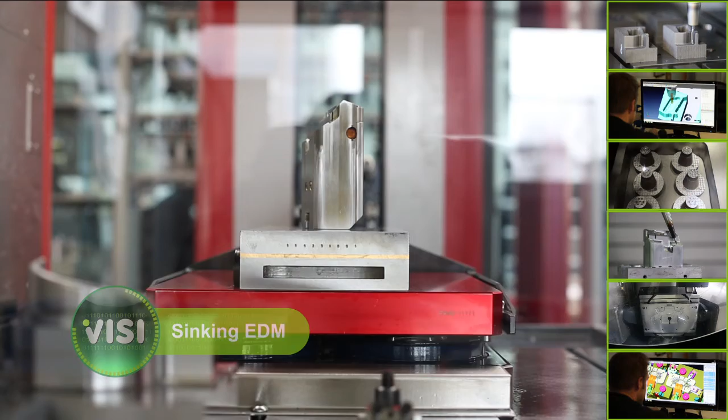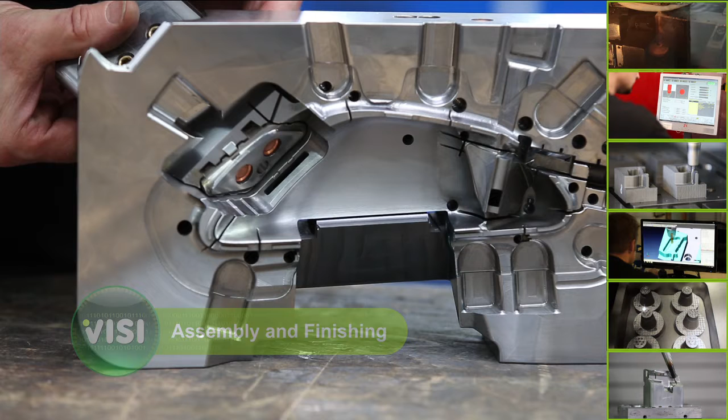VISI, the CAD/CAM solution for the mold and die industry.

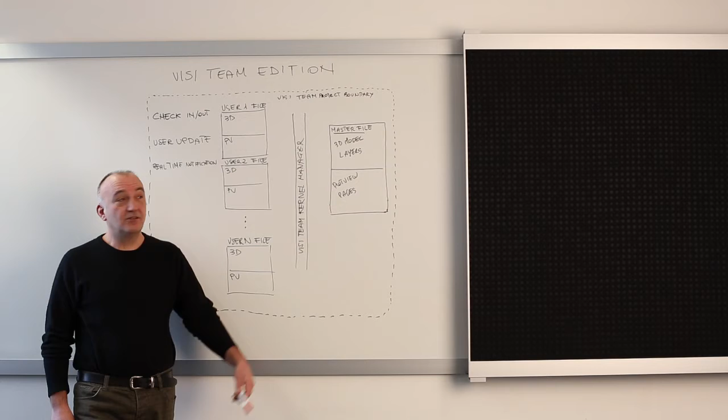During design time, a user has to be able to provide updates of their work to other team members to ensure high level of transparency of the work progress. The VISI Team Edition implementation is based on a number of fundamental concepts. First, the master work file and user work file concept.

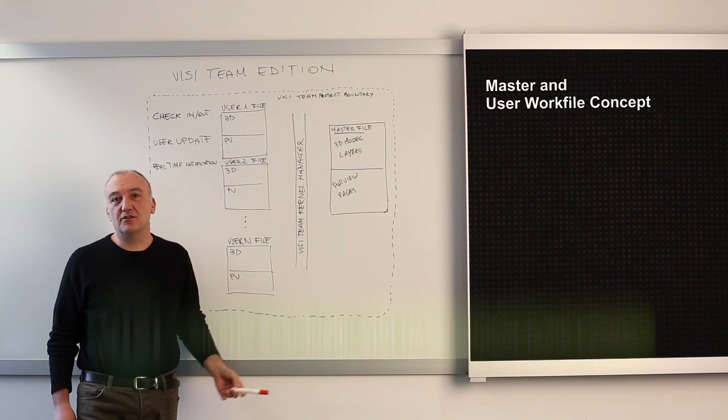The master work file contains all data created by each individual team user. As users should be able to work independently, VISI implements another file type, user work files. These are file copies directly assigned to single users, allowing them to perform their individual jobs.

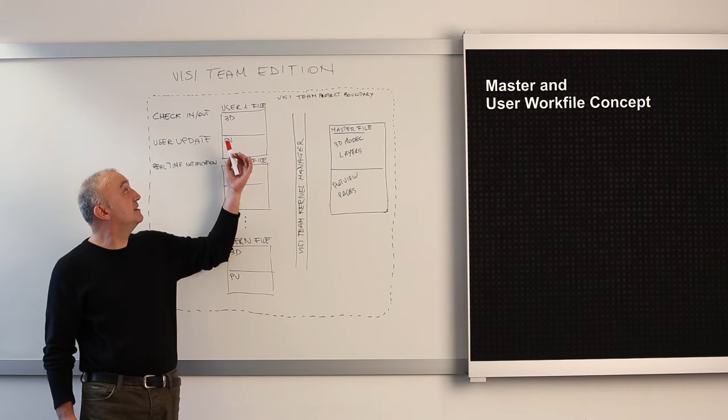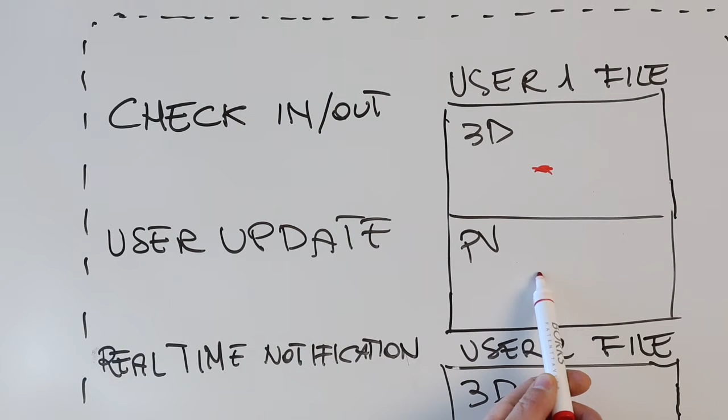Another fundamental principle is the check-in and check-out concept. Every user working within the 3D modeling environment or the 2D plot view environment has the ability to reserve a set of layers in the 3D environment or a set of pages in the 2D plot view, which moves them to a single user mode. This mechanism is called check-out.

Once a user performs the check-out operation, they have exclusive access to the previously selected layers and plot view pages. This feature enables them to work independently until they decide to share their progress with the other team users. The sharing operation is called check-in.

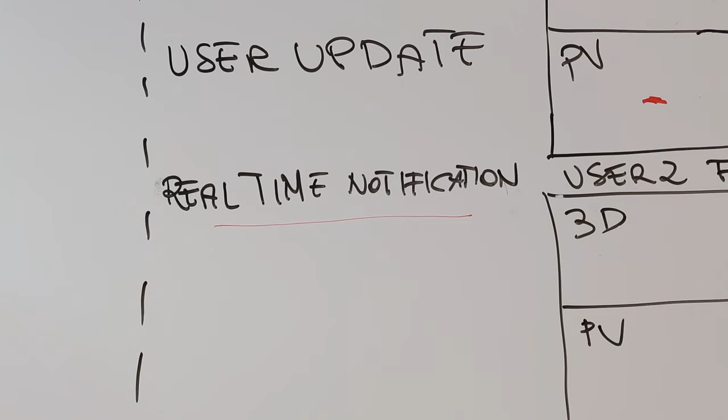During the check-in operation, the user data is transferred from the user work file 3D environment into the master work file 3D environment. In addition, all active team users receive a real-time notification about the changes made within the master work file. This allows them to perform an update operation, which means they can apply the work progress checked in by another team user to their own user work file.

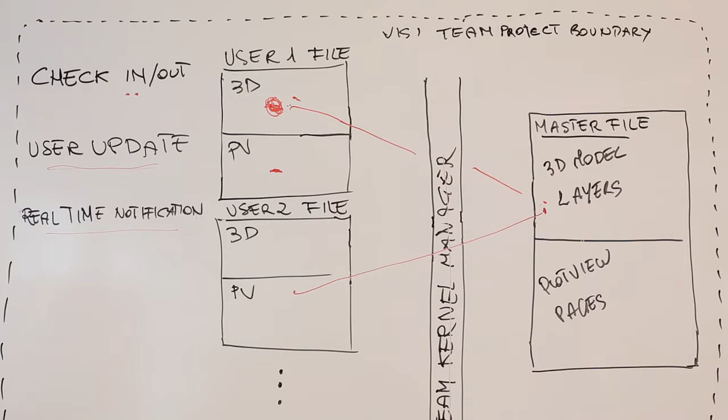All concurrent accesses to the master work file are handled by a software layer called VISI Team Kernel Manager. It is specially designed to ensure a solid performance when operating in team mode. The third essential concept is the ease of use.

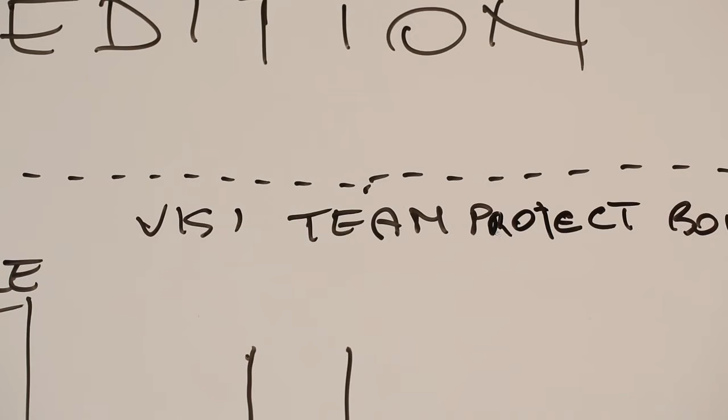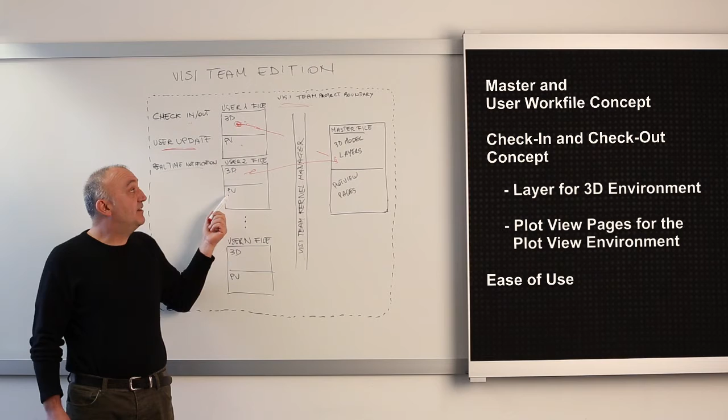Team users do not have to deal with either the architecture or the handling of internal mechanisms. VISI PDM provides a completely transparent and easy-to-use interface that enables users to work both independently as well as together with the whole team.

In our realistic example, a team should design a complex injection mold. For this task, 2 3D designers and 1 detail designer are designated. The first designer edits the ejector side, while the second designer creates the injection side. The detail designer supports the team with the 2D plot view creation.

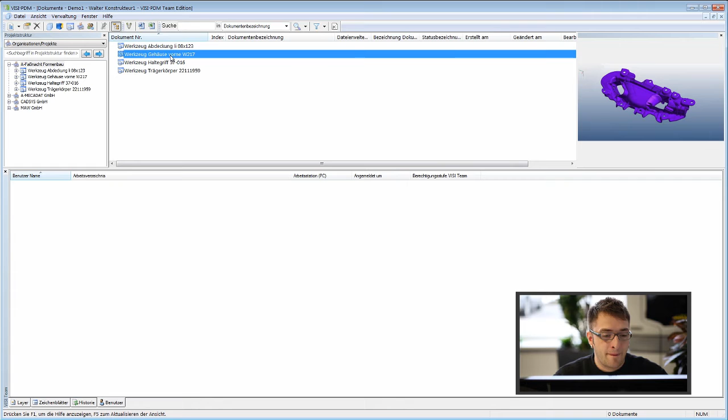At first, the team leader creates a project in VISI PDM Team Edition and includes a basic design he prepared previously. Basic structures for the tool, such as size or layer definitions, are defined within this design. Once the foundation is defined, the team leader activates the team mode.

He sees the layer structure and the plot view pages definition of the basic construction in the VISI PDM Team Edition. In the next step, he defines the design team by adding users.

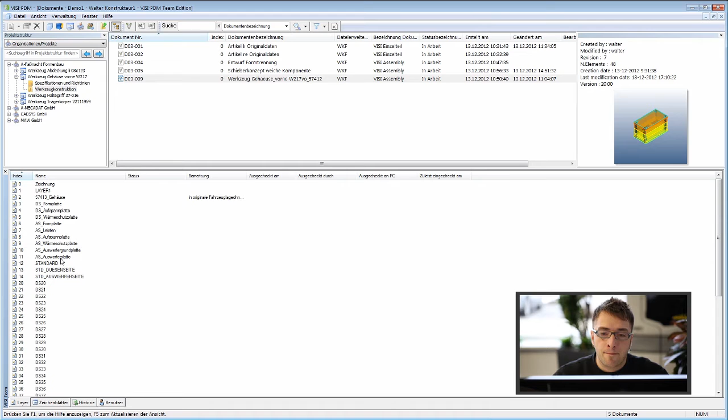The first designer reserves the necessary layers of the ejector side via a so-called checkout operation. Thus, all layers assigned to him are unlocked within the 3D environment and he can start the real design work.

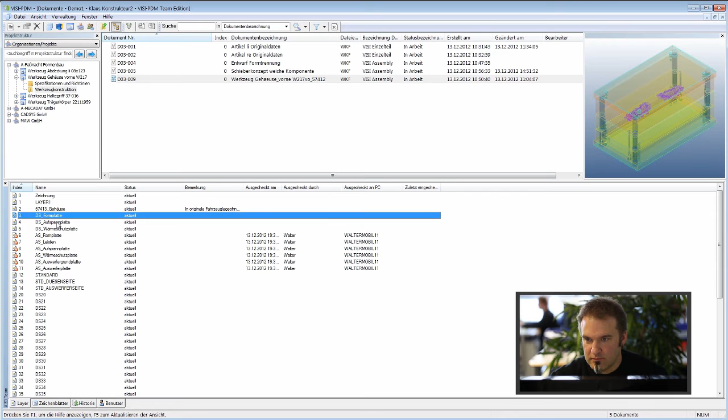At the same time, the second designer, who is already logged in at VISI PDM, begins work. He sees in VISI PDM that certain layer sets of the ejector side of the tool are currently being edited by the first designer. Consequently, these are currently not available to him. The second designer starts working on the injection side by reserving the relevant set of layers. Ultimately, the designer starts VISI and begins the real design process.

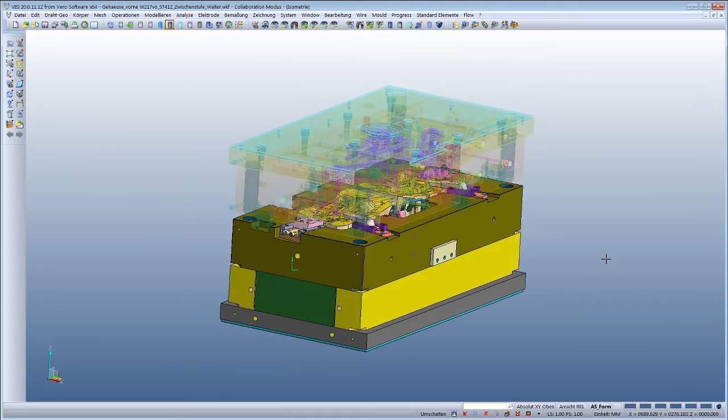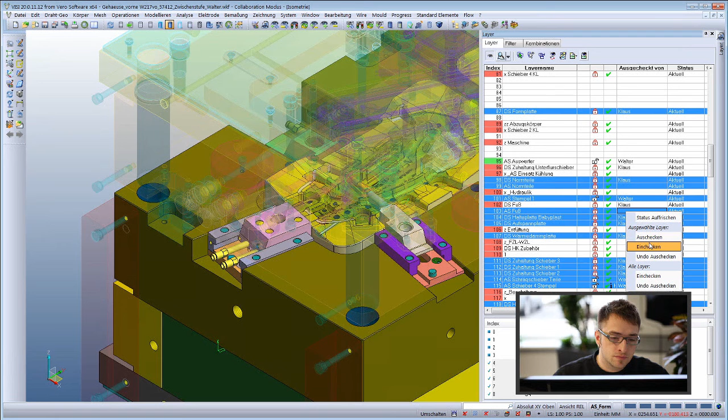As the design progresses, every designer gets to see all sets of the tool. Sets that are currently not edited by the designer himself are displayed in a faded-out, transparent way and naturally locked for edits. In the Layer Manager view, the current status of every layer is displayed for all users. Operations like check-in and check-out can be run with the Layer Manager to reserve additional sets or create new ones.

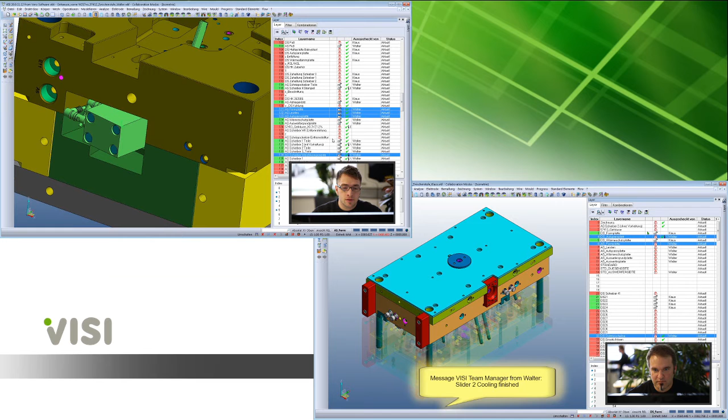Our project is now in a progressed state. The first designer installs an underfloor slider as well as the cooling of the die plate. The designer has now completed the design steps mentioned previously. Thus, the progress made should be provided for the team members. To perform this operation, he checks in the relevant layers. During the event, the master file is updated and the comment previously created by the designer is added to the history. The second designer receives a real-time notification with the corresponding comment.

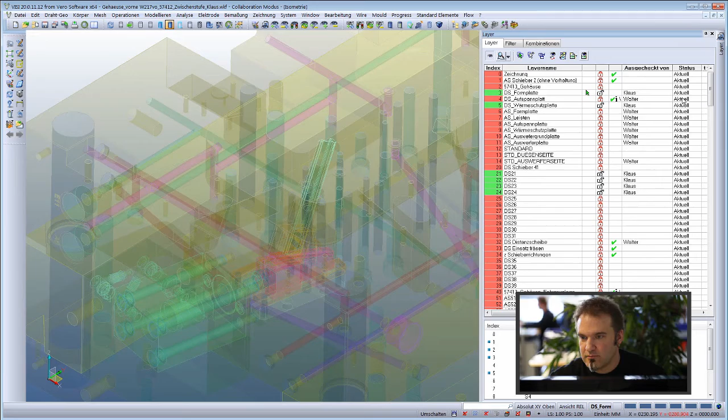With the Layer Manager, the status of the updated layer changes. VISI displays that these layer sets are deprecated in his design. Consequently, the second designer updates his file and is now able to view the current state, including all changes made by the first designer. He can access locked layers and perform operations such as measuring, querying, etc. and continue working in his environment.

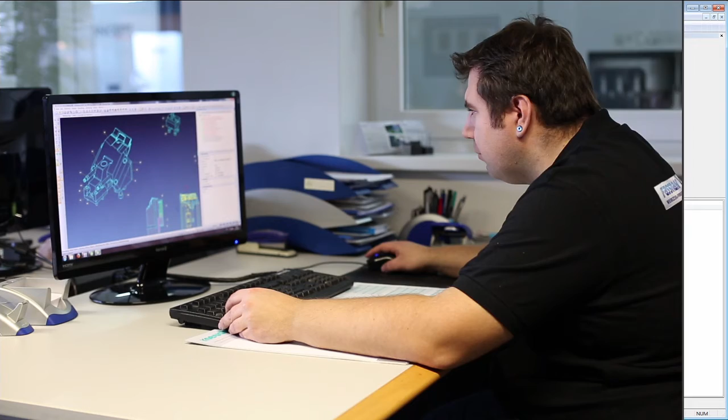Another important aspect is the bill of material. Although the designers are working on different sets of the tool, they can simultaneously edit and complete their section of the bill of material within the VISI Assembly Manager. The bill of material view of VISI PDM displays the current bill of material version of the whole design. You can not only distribute the 3D environment among multiple users, but also the plot view pages to speed up the tool documentation.

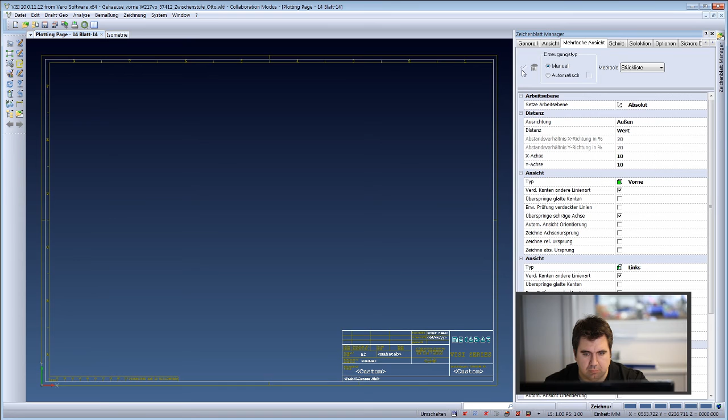After the launch of VISI, the detail designer is able to reserve the desired plot view pages and create new ones, of course. In the Plot View Manager, the created plot view pages are displayed with their corresponding status. The designer checks out a 2D plot view page and starts the plot view creation. Plot view pages assigned to him can be viewed, but not edited by other team members.

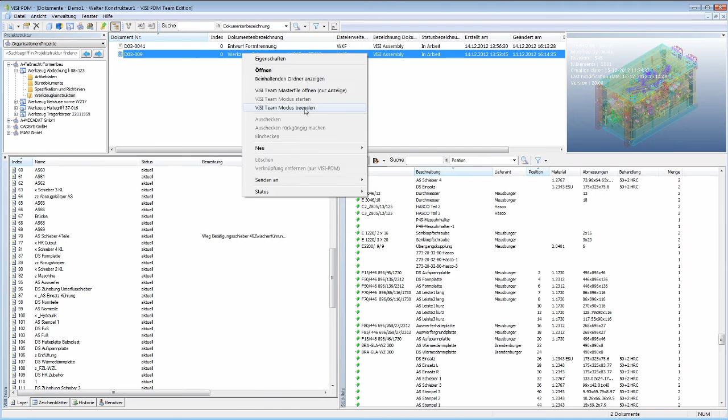After the completion of a plot view page, it is checked in again, resulting in an update of the master file. If all design jobs are checked in and the design is completed, the team leader ends the team mode. Afterwards, the whole design, including the plot view pages, is again in a single work file that is now ready for production.

VISI Team Edition consists of VISI modeling and VISI PDM. It is an integrated solution that allows the design process to be split among several team members. Distribution and management of their project data is handled completely and automatically by the VISI system. Therefore, the user can completely focus on the tool design without having to worry about any of the processing mechanisms.

This makes VISI Team Edition the ideal solution for a designer team to work simultaneously and together on the same project. It provides short learning and implementation time thanks to a simple and intuitive user interface, the possibility to work on extensive and complex tool designs in a team, and shortened cycle times during the design process and thus shortened delivery periods.